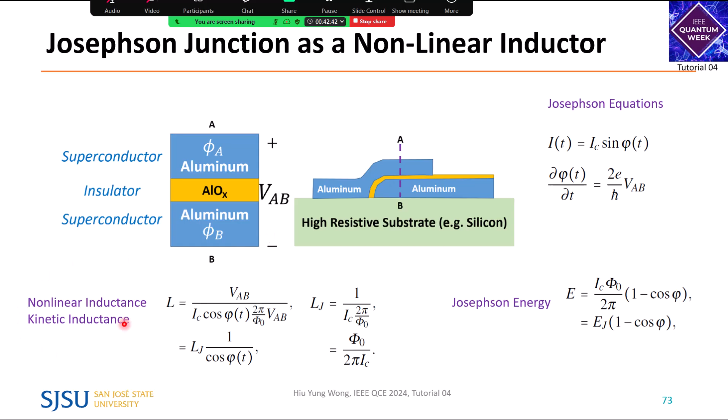So even for a normal metal, we have kinetic inductance. But because of the generation of heat, the slowdown of the electrons due to friction, the resistivity, it is not important. The main point here is that we can create very large inductance with a small geometry with a Josephson junction, and we'll see that later in the tape out. Okay? So the main message to take home is that the Josephson junction provides a nonlinear inductor.

And why is this important? We had a lack of anharmonicity because we had a linear inductance in this LC tank. Now, what if we replace it with the Josephson junction? This is the symbol of a Josephson junction. The cross refers to the primitive part of the Josephson junction that gives you the Josephson equation. But this is a capacitor. Of course, it also has a parallel capacitance, right? So this is the symbol of the Josephson junction.

Now we replace the linear, geometric inductor with this Josephson nonlinear inductor, and put it in parallel with the capacitor. Originally, we had this parabolic potential well in the LC tank. Now with this nonlinear inductor, you get something with anharmonicity, which is actually sinusoidal. It actually has a cosine term, if you look here, but we don't need to go into detail.

Basically, this is periodic. And because of this, naturally, if you solve the equation, the separation of the levels won't be constant anymore. Very commonly, the first separation will be larger than the rest. So with this, we successfully create a qubit with two well-defined levels and a low probability of being excited out of the Hilbert space, that is, the 0 and 1 states that we are interested in.

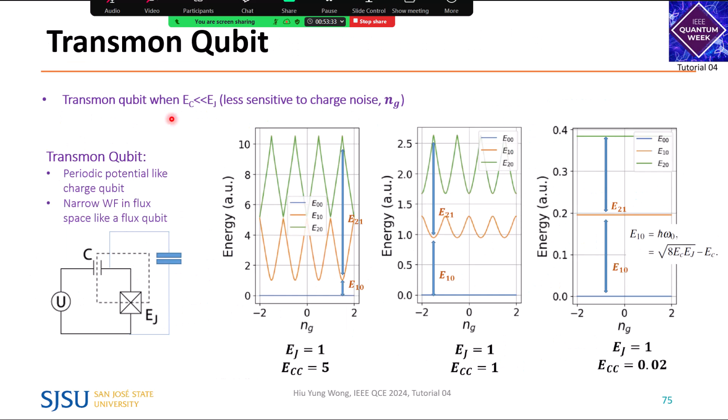So it's the same here. I set up the landscape, then I get this Hamiltonian. Let's look at this Hamiltonian. First, I have omega 0. This is just the qubit frequency, E10 that we mentioned earlier, this one, okay?

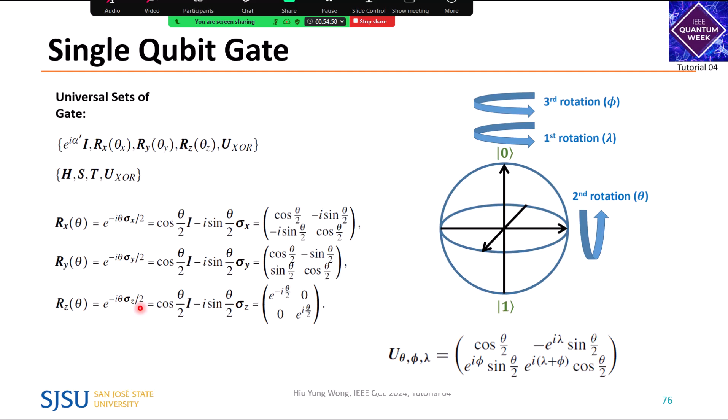z-axis. So with this, basically, I am able to rotate the qubit on the Bloch sphere about the z-axis and also about the y-axis at the same time. And how much do I want to rotate? All depends on how long I apply this pulse and what shape I apply. Is that okay? So here it shows that you can use circuits to control something that looks quantum mechanical.

Now, this is not convenient. Originally we could just stop here, but it would be good to say a little bit more. We don't operate the qubit in this way. You often will hear about something called rotating frame or rotating wave approximation. So what does it mean? This one, although it looks okay, only allows us to rotate about y. That is not enough. We want to have more flexibility. We want to rotate about x also.

So without derivation, we can show that if we work in the rotating frame, it means my whole system is just a mathematical transformation. Instead of looking at the qubit from a lab frame, I try to work together with the Larmor frequency, because it is rotating about the z-axis, just like a merry-go-round. Instead of standing outside, now I jump on top of it and measure the physics. Then we say we are working in the rotating frame. With this rotating frame, we add something called rotating wave approximation. Then I will be able to come up with something more elegant, right? And what is rotating wave approximation?

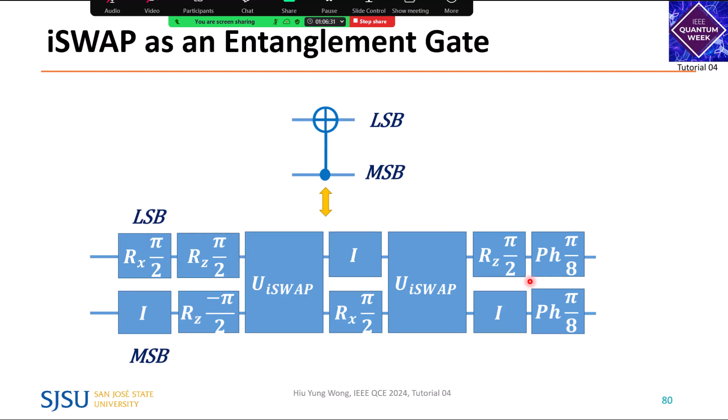So with this, cool, then we are done with the 1-qubit and 2-qubit gates, and we can implement any algorithm from this point onward, right? Although whether it's efficient, that is another matter. Okay, now, so we now have a well-defined 2-level system. We have the universal set of quantum gates, but how do we do the measurement, right?

But no, actually, I need to continue just to talk about the manipulation also. So exactly how a superconducting qubit system usually looks nowadays. These are the room temperature high-speed electronics, FPGA, Python programming, arbitrary wave generator. We can create microwave digitized pulses, megahertz or sub-megahertz high-fidelity digitized pulses easily. That is the S of t, the envelope function we mentioned earlier.

Then we go through the mixer to bring it to high frequency, to gigahertz. Go through all these attenuators from room temperature, and then eventually we reach a resonator. This resonator is coupled to a qubit. You also can just capacitively couple this one to the qubit to do the 1-qubit gate. If you're doing the manipulation, you are done. You send a pulse, the wave function changes.

But if you try to do the readout, you will try to measure the output from the resonator. And then based on the output, you can determine whether it is 0 or 1, which I will discuss later. But the signal, of course, needs to get amplified in different stages, and then eventually down-converted to the megahertz regime so we can analyze it, right? So the whole superconducting qubit is really just one boring passive transmon qubit here. The rest are just the exciting programming, controlling, cryogenic electronics engineering, electrical engineering, right?

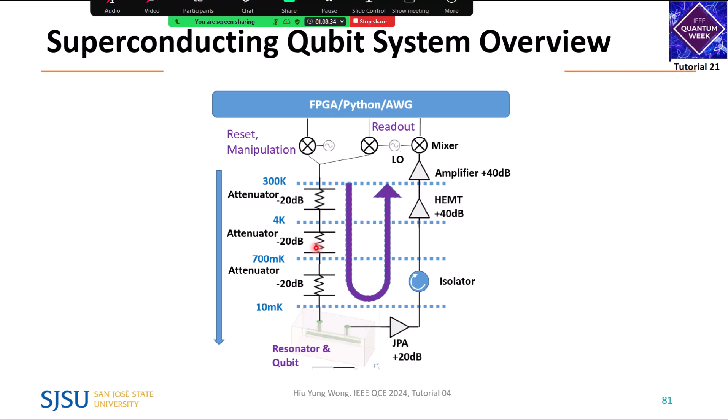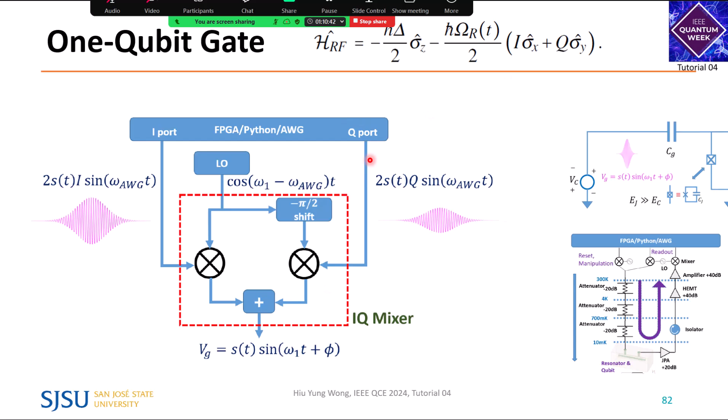And the amplitude of this digitally synthesized curve contains I, which is related to the phase of the final wave. And this phase is going to control how much rotation I have about the x-axis and y-axis. Right? In summary, I can determine how much it rotates about x and y by just changing the amplitude of this signal.

So we are done with the manipulation. Then how about readout? So here I show an example, a possible readout. So it is a transmission line. If I have a signal going in, it actually will get blocked unless this resonator is resonant with the characteristic impedance of this transmission line. Let's say 50 ohm. This is also at that particular frequency, right?

So if I sweep the frequency, at most of the frequencies I cannot transmit any signal. The S21 will be very small. Only when at the frequency of this resonance will I be able to transmit the signal from left to right. Right? So I will expect something like this if I sweep the frequency.

Correct? Now, then how do we measure the qubit? It turns out that just because of physics, which we won't prove here, it's just like the so-called cavity quantum electrodynamics. You put an atom in a cavity, the resonant frequency of the cavity will change based on the states of the atom, whether it's excited or at ground state. And it is the same here. I have a Transmon qubit capacitively coupled to this resonator. The resonant frequency will shift based on the state of the qubit, whether it is at 0 or 1 state.

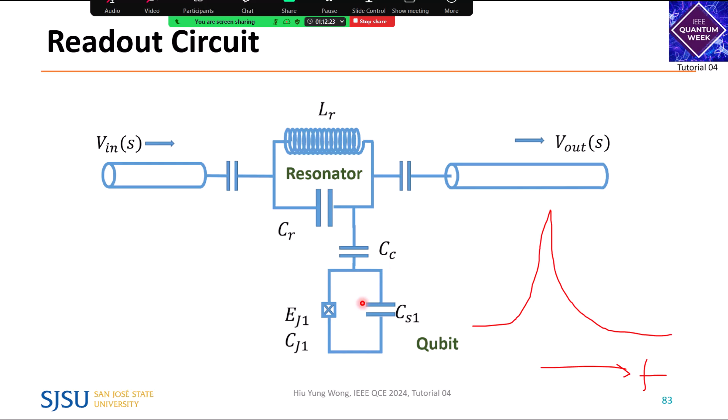In this example, let's say originally the resonator frequency is here. If the qubit is at excited state, the resonant frequency will shift to the left. If it is at the ground state, it will shift to the right. Now, if you try to just shoot a pulse at the original resonant frequency of the resonator, you will get the same magnitude. You cannot distinguish, right? If this is so symmetric like this one, you don't know whether it's at the ground state or excited state, 0 or 1.

However, we will measure its imaginary and real part. If you decompose the imaginary and real part, the blue is for excited state. The real part is the solid line, and the dashed line is the imaginary part. You see that when it is at excited state, the dashed line is about 0 at omega r. For ground state, the green dashed line is also about 0 at omega r. But for the real part, the excited state is negative. The ground state real part is positive.

So based on this, you can think that, hey, I just measure the transmitted signal. If the real part is positive, then I know it is at ground state. If the real part is negative, then I know it is at excited state. And basically, this is just measuring the phase information of the transmitted pulse, right? So this is something called measurement using the dispersive shift of the resonator. And the difference of this frequency is called the chi. This is a very important engineering problem in superconducting qubits. You want to have enough separation, otherwise you won't be able to distinguish them. So the chi needs to be large enough.

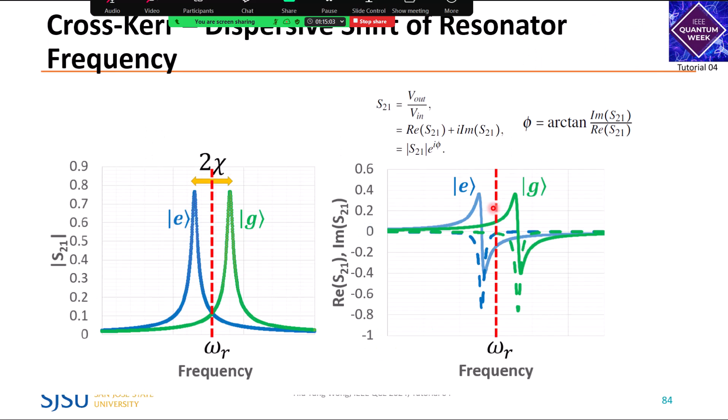Now, if everything is ideal, then if it's at ground state, I will get a positive real part. If it is at excited state, it is negative, right? So I just measure it. I see a negative value, I say this is 1. I see a positive value, I say this is 0. But in reality, you have noise. When you have noise, you can imagine that this will fluctuate because of the noise. So when you do the measurement, you actually have a distribution about these 2 points.

It is also very common that people don't plot it in this way. They do some transformation, plot it like top and bottom, on the so-called IQ plane. This is in-phase, this is quadrature, which relates to the microwave signal we are processing. But the microwave signal, again, is just related to the phase, right? That's how they call it. So when you have noise, this circle will get larger and larger. Or if your chi is not enough, the dispersive shift is not enough, they will get closer and closer.

Now, once they touch each other, then you have a lot of readout noise. For example, if I find a point here, it has a certain probability this is actually a ground state. It also has a certain probability this is really the excited state, right? And that is the readout noise that one will get if you don't have the right design.

So how do we get this IQ plot, right? It is just the inverse of the manipulation pulse generation. Here represents what goes out from the resonator, right? We shoot in the pulse, and then now we go back to the amplification train. So what we do, again, I just make up the math.

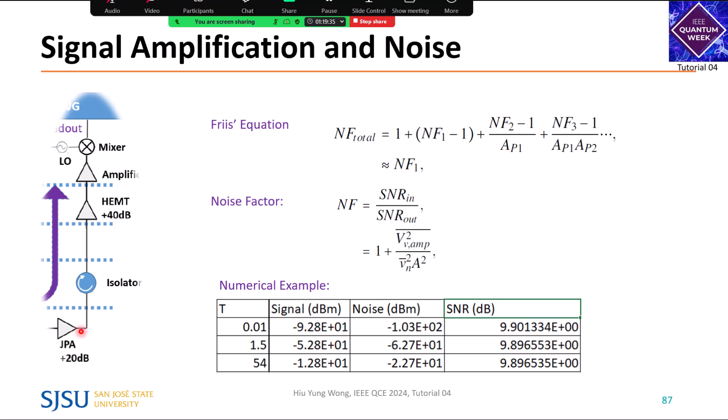So that's why we want to have a low noise figure first stage amplifier in the train. In other words, we want an amplifier in the first stage that injects the least amount of noise to the signal, right? It keeps the signal to noise ratio as high as possible. And what is that? Theoretically, the best one is a quantum limited amplifier. You cannot design an amplifier that does not add additional noise to your signal because of quantum mechanics, because of the Heisenberg uncertainty principle. People mathematically proved that. So this is just something I want to highlight.

Because of time, maybe I will not talk about parametric amplification. This is just to explain what a quantum limited amplifier such as a Josephson parametric amplifier does. I won't talk about the classical example, but here I'll just tell you how it works. So you have a signal coming in. It goes through the circulator. A circulator basically directs the signal to go around this circle. It cannot go back. And then you have a Josephson junction.

Again, why a Josephson junction? Because it provides non-linearity. So this forms a SQUID, and this is an inductor. If you have a flux that is 2x the frequency of the signal, it helps to mix them together, and somehow it can increase the signal strength of the incoming signal. Okay, and this is just like the swing, right?

When you're playing on the swing, you need to stand up and down at 2x your swing frequency. And that is called parametric because you're actually changing the parameter of the swing. Because you go up and down, you're actually changing the centroid or the effective length of your swing, right? Or the center of mass of the swing. As a result, you are able to amplify the swing. This is something like that, right?

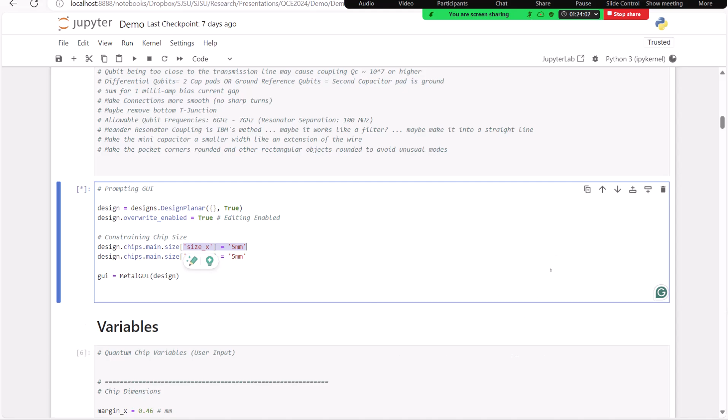You can define, for example, I want to design a chip with a chip size of 5 millimeter by 5 millimeter. I define the variables. I define the length of the resonator. I decide the launch pad, etc. So let me just go all the way to the end because it's not my intention to discuss the detail.

So now, it crashed. So this is one problem. So let me do it again. Restart the kernel. Okay, that works. I need to run it first. So you may run into this problem. But again, I show you the link to my video, and also you can go to the Qiskit tutorial. They have a lot of good examples. Of course, ours is modified from theirs.

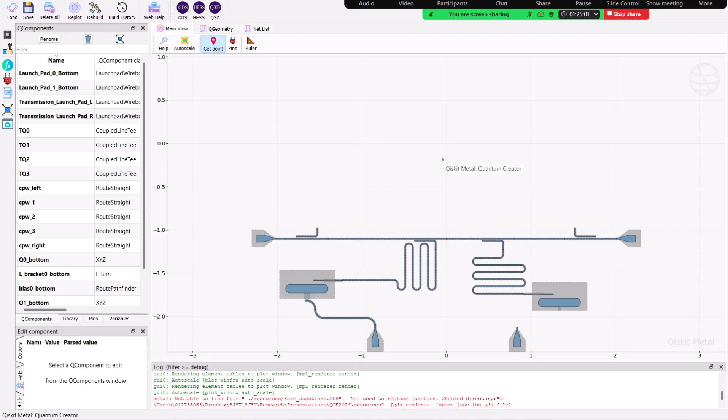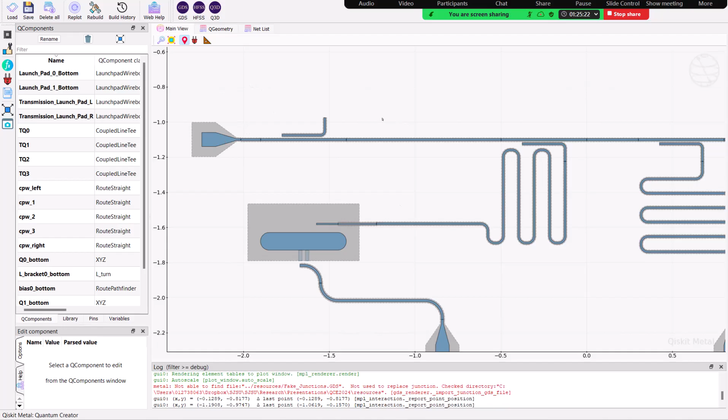So now look at this. From scratch, it generates the whole circuit for us. Of course, we need to keep testing until we get the right thing. You see that this is a launch pad. And then this is a coplanar waveguide, a transmission line. Now, if I zoom in, this is the transmission line. Let me zoom more. You don't see this here, but when you generate the GDS, this will be the superconducting metal. And then this is also the metal, and this is the gap. So let me show you what it means.

So let's say this is the transmission line. This is the GDS it generated. You have the gap. If you do a cut in AA, you see that these are the niobium superconducting metal. And then these are the spaces. The middle is the signal, and then space, and then ground plane. Okay, so ground plane is everywhere. That's the first thing.

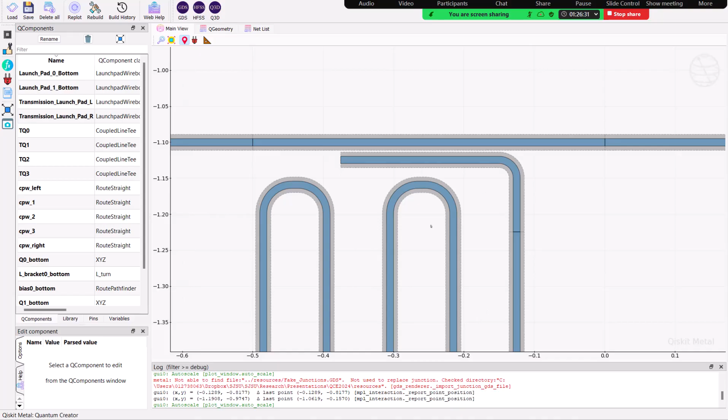Second thing is, with this transmission line, just like for readout, if I have a signal come in, then it will go all the way to the right. But you see that here, we can couple capacitively, but in this design, it's inductively coupled to a resonator. Why do I say it's inductively? Because you see that this is a conductive plane. All this white part has not rendered yet. Eventually, it will also be metal. So this is metal connected to metal. So it's grounded. So there's no voltage signal, but it has a lot of current. So it's inductively coupled to the coplanar waveguide.

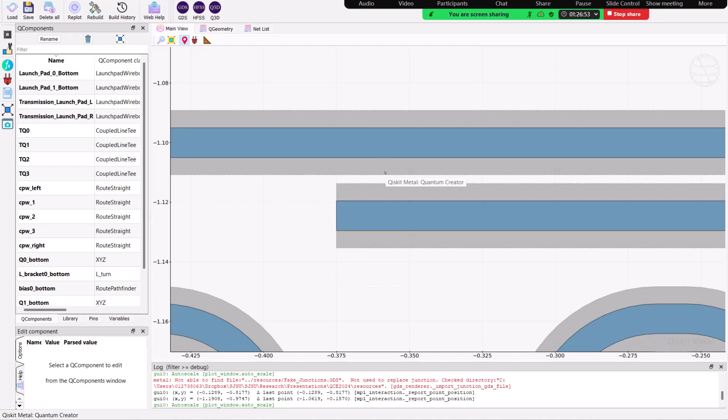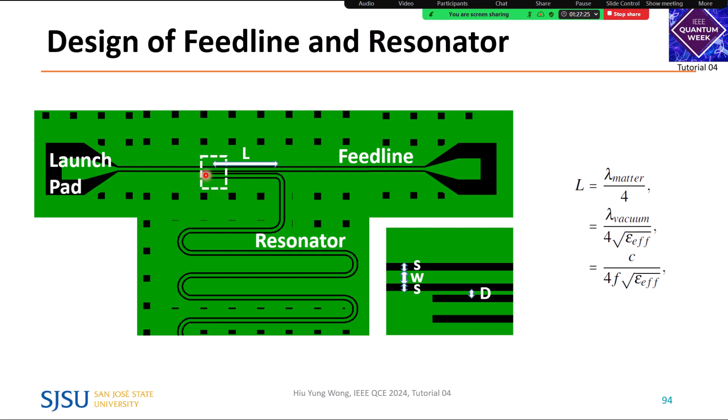So what? Now, if you inductively couple to this, then this is a resonator. You design it so that you have the right resonance frequency. For example, in this case, we design it so that the length is lambda over 4. That means the length of this resonator equals the wavelength divided by 4. And because it's inductively coupled at one side, it's shorted. And I did not tell you that at the other end, here, it is capacitively coupled to the transmon qubit.

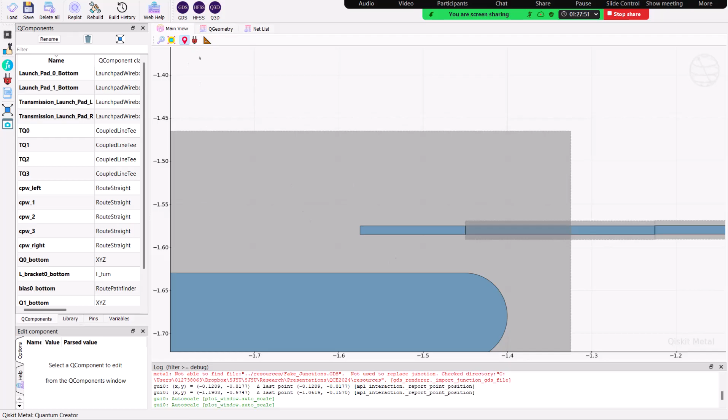So lambda over 4 is the first mode that it can have. Just like the guitar string. But with a guitar string, both sides are actually fixed. Now it's lambda over 4. So that's the first thing. So that's how you design it. Another thing is about the transmon.

So there are many ways to design it, right? Also, what I'm showing you is not the final one or the best one, but we can see a little bit here. Here it's just a placeholder. We have not put the Josephson junction yet, right? When we tape out the GDS, we will then put the foundry's layout. They will provide us the layout of their Josephson junction, or they will put it for us. We just say that I'll put it here, and we tell them what Josephson inductance we want.

So you see, this is a big cap, right? And then here is also ground plane. So basically, we form a big capacitance here. So that's why this is a transmon, because I have a Josephson junction and it's in shunt with a capacitor, right? So, yeah.

Just for layout, it is not. I will explain more later. So he's saying that it's not a part of this layout. At this point, it is not. But actually, a little bit. Let me talk about that. But anyway, this is a Josephson transmon, and it's capacitively coupled to this resonator. So we can also use this one to manipulate the qubit.

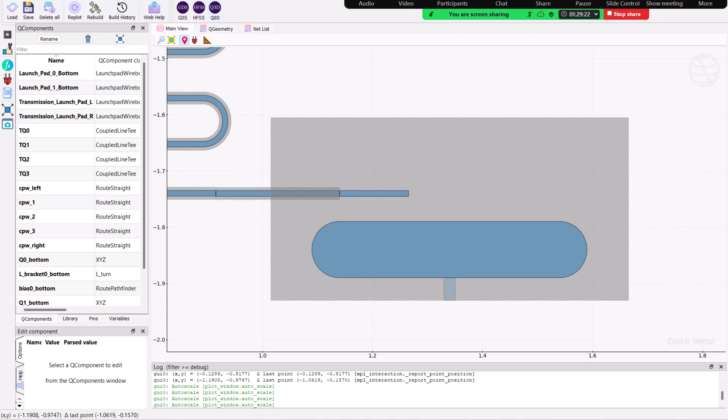Now, for example, in this particular case, we actually share 2 qubits using one single coplanar waveguide. We can use it to read the states of the qubit, and we also can use this to manipulate the qubit through this resonator capacitively. Of course, we need to design them so they have different qubit frequency. So this is a little bit like frequency multiplexing, but not at the same time. We can selectively adjust that.

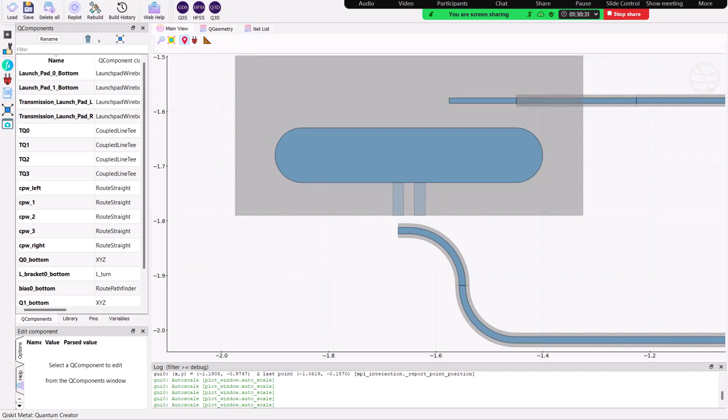On the left, I want to show this because you see we have placeholders to put two Josephson junctions. That is because we want to make a flux tunable qubit. I told you earlier, the flux tunable qubit is made by putting two Josephson junctions together to form a loop. And this is the area of the loop. So go back to your question. The only thing that we decide with the Qiskit Metal, up to this stage now, is how large the loop is, because it determines how much flux we can go through, right? And we couple it to this line, and this is the flux line.

When we want to tune it, we will apply a current here. And if you look at here, again, this goes to the ground. So the current keeps flowing, and you can imagine the magnetic field will go around so that I have lots of flux going there. So by changing the strength of the current and the duration, the strength of the current will change the frequency. So I can bring them together. And for the right time, then I can make an iSWAP gate.

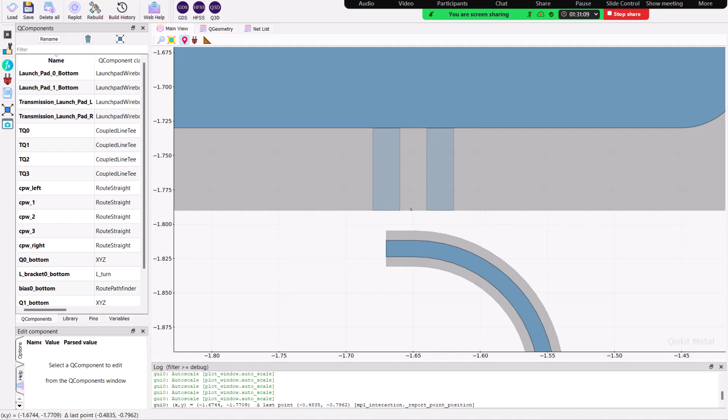But here, of course, be careful. I did not couple them. So these are actually two separate qubits. I did not show that. If I want to make a 2-qubit coupling, I need to add a capacitor to couple them together. Then it is a 2-qubit gate. Again, a very hand-waving discussion.

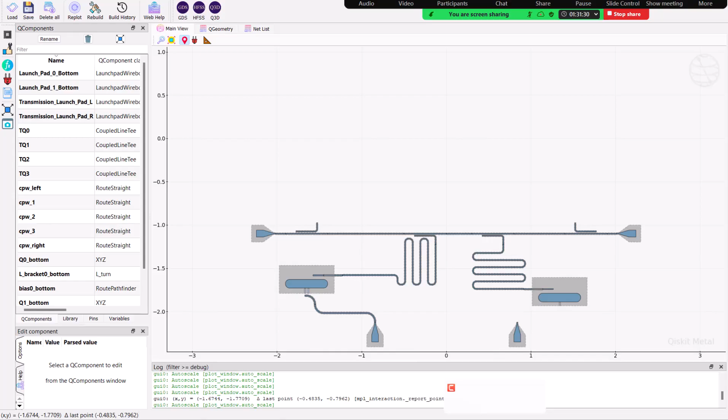But this is the first thing regarding the Qiskit Metal, right? It helps us to generate the layout easily, and you can just modify it. If you find something wrong, regenerate. And these are very common tools being used, right? So I already explained all the components here. Yeah.

Yeah. They do. They do. No, this one is just for layout. We have not done the simulation. I will talk about simulation. Here, instead of manually laying out, you use this script to help you lay out a big chip, for example, right?

So now our goal is that when you want to design a circuit, for example, I want to design this 1-qubit gate. There are a few criteria. Remember, I want to make it a transmon. I guess I have a typo. It should be EJ over EC larger than 50. Sorry. We want to make the Josephson energy much larger than EC, right? So this is a typo. Should be larger than 50.

We also want to make the anharmonicity at least 10% of the qubit energy, right? It means that E21 minus E10 had better be 10% of E10. Now, this one I did not discuss. It's worth mentioning a little bit, and also it's almost time's up. So far, if you remember all the currents I showed you about the Josephson junction, it depends on something called IC, the critical current. This is the current above which you will lose the superconductivity of a Josephson junction. You cannot put too big a current through it.

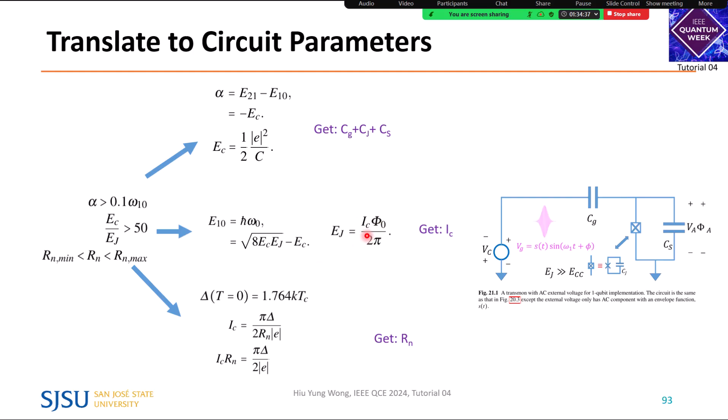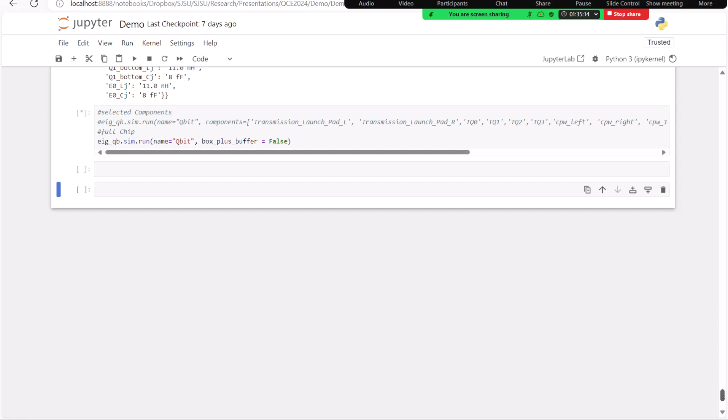We discussed that already. Then the last thing is this. Now, you were asking, do we need simulation? Yes, we definitely need simulation. The second part of this script is that now, with this, we created the layout. We will then call a tool called HFSS. Instead of manually drawing your layout in HFSS, which is a microwave simulator, it will call the tool and perform the simulation. It takes time to load, but while it's loading, let me just say a few final words.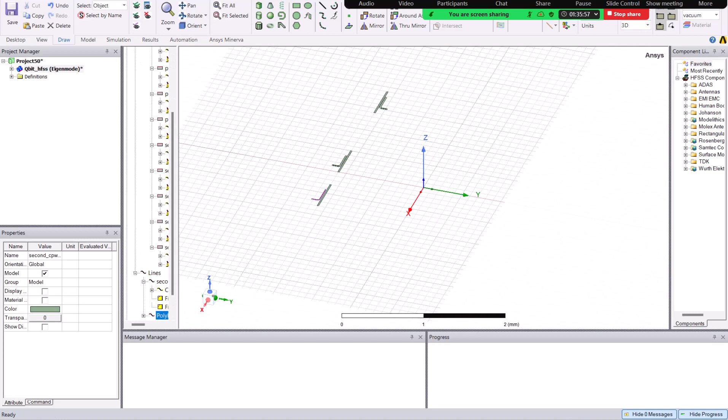First, you draw it, and we will just assume the Josephson junction has the Josephson inductance that we want. Now you see that the whole game is all about having the Josephson junction as a nonlinear inductor. So we don't need to do any quantum mechanical simulation, right? All we need to do is assume that it has a certain inductance. Then we can do the circuit simulation. Now you see that it rendered the structure we have drawn here very nicely. It takes maybe 1 minute to render, and then it will start doing the simulation.

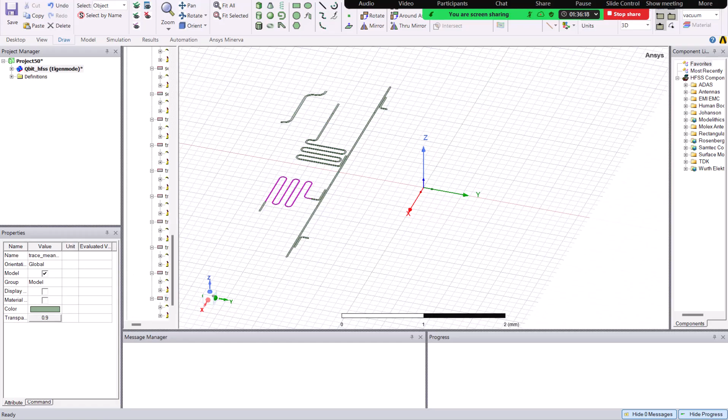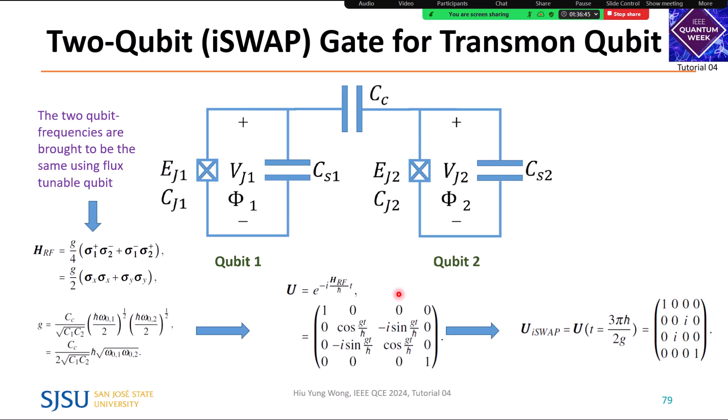What does it do in this command? We ask it to find the eigenfrequency and also the Q factor of the circuit. The eigenfrequency will give us the qubit mode, the resonator mode, etc., so that we can make sure that what we are designing meets the spec we have. Because again, remember, for example here, G, the coupling factor of the 2-qubit gate, depends on the resonant frequency of the 2 qubits. And that resonant frequency can be simulated, which it is simulating now, right?

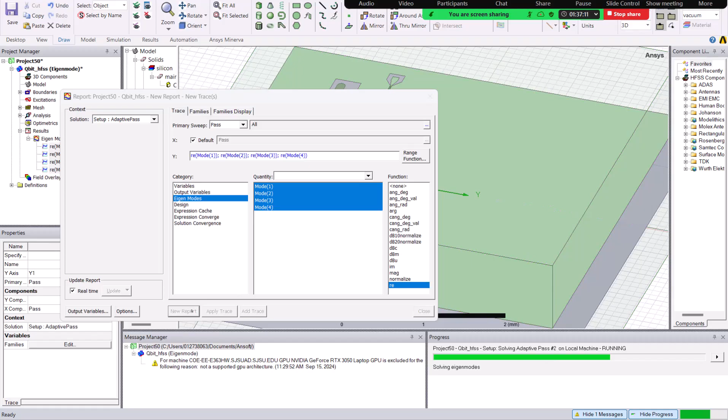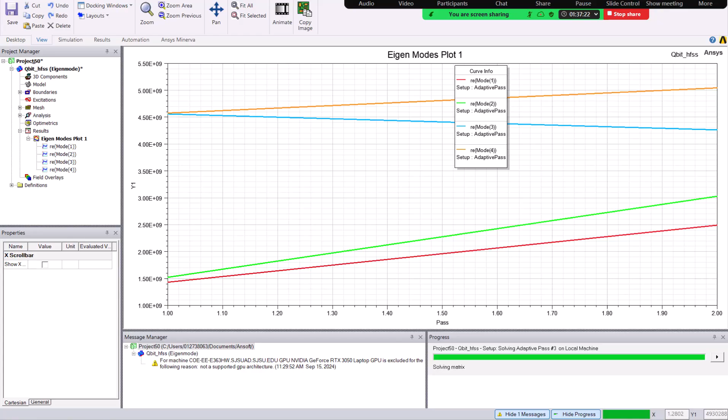I can go to results, create a plot, and then ask it to plot the frequency versus the passes. Passes are how it tries to converge. I'm trying to simulate 4 mode frequencies. It only finished 2, but gradually you see that it has 4 modes. I have 4 important parts. If you look at this structure, I have 2 qubits and 2 resonators, right? So I can actually try to see where they are based on this.

So, just give me 1 more minute. I know it is 2:30 already, right?

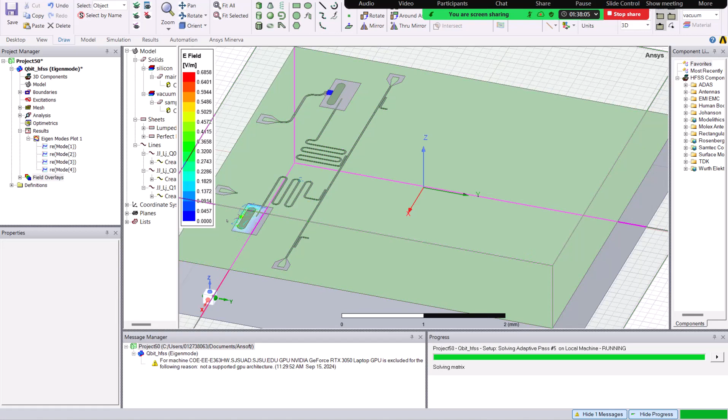So I'm going to right click. I will ask it to plot the field, the electric field on the structure. And it will keep updating, right? Because it still doesn't have the right result, so it's still a little bit noisy. But you see that the first mode is this qubit. And I can ask it to plot the second mode. I go to analysis, field, edit source. Right. So instead of plotting the first mode, I ask it to plot the second mode.

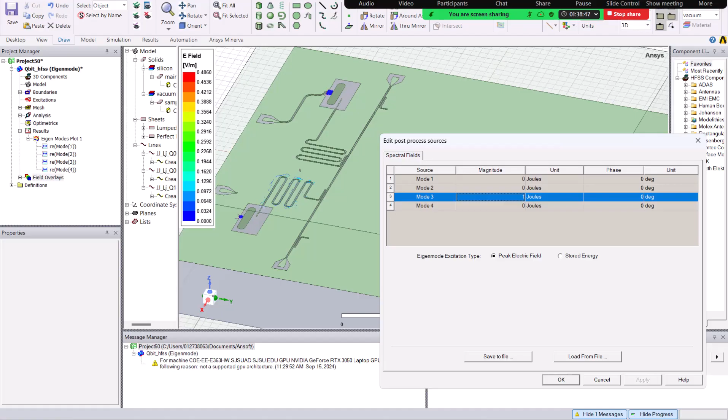Then I see the second mode is on the other qubit, right? And maybe just one more demonstration, ask it to plot the third mode. And you see that it's at the resonator, right? It is not converged yet, so that's why it is not very nice, but it gradually converges. Now you can go back and say, hey, this is not the frequency I want. Then you go back to redo your layout and simulate again. And eventually you need experimental verification.

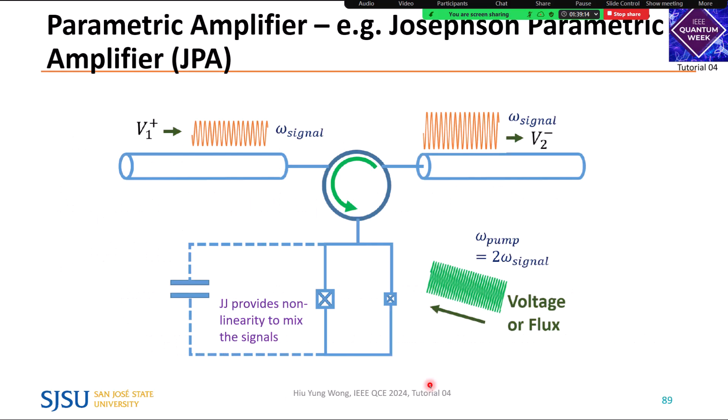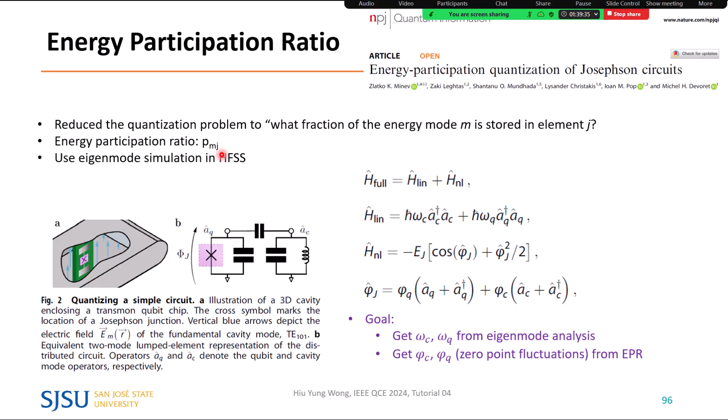This is useful, but one thing even more useful is that people have developed something called energy participation ratio, or something called BBQ, black box quantization. We just need to do this classical simulation, and this classical simulation will tell us how the energy participates in different components. They came up with a theory that tells us you can find the chi, the cross-Kerr. What is it again? It is how much you shift the resonator frequency for readout. It can also calculate the anharmonicity. So you just do this classical simulation.

You already know what the cross-Kerr is, what the anharmonicity is. Then you can design your quantum chip already. And that's why I say you don't need quantum mechanics. Everything is purely classical at this stage. But we assume they do the right thing. Yeah, and I do have a video on how to do installation of this, do the EPR.

And I think we will just conclude here. That's all we have. Maybe we can take questions?

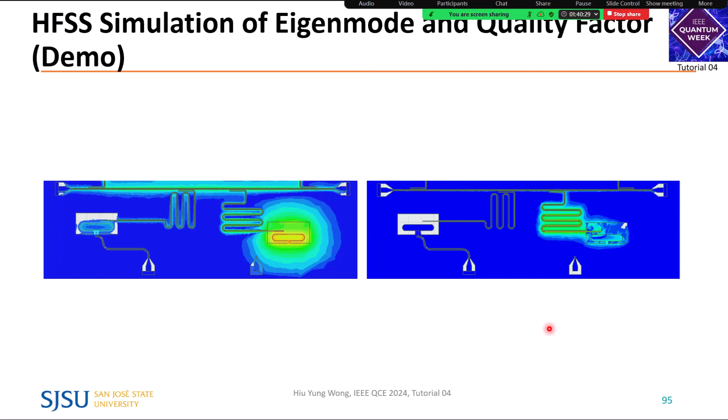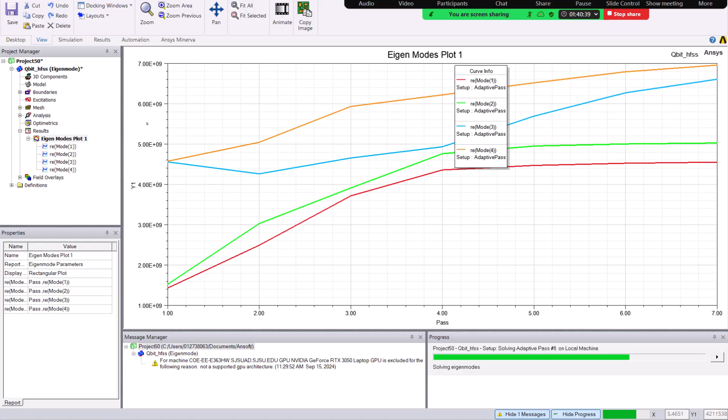Actually, what's your favorite way to simulate superconductors in this process? So I think you run eigenmode simulation assuming the superconductor. Yes. Yeah, so we don't really simulate the superconductor. We just make it a perfect electric boundary condition. Yeah, and that's it. Okay, so now it's Q&A, so I can spend more time. Feel free to leave if you're in a rush. But I want to show you this.

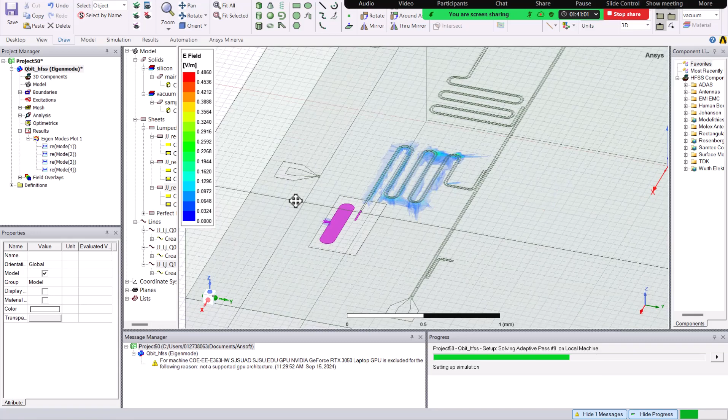In principle, right, you want to simulate the Josephson junction. So here we have a Josephson junction. In principle, you want to simulate it. But actually, we did not. What we did is just add a boundary condition to it. Yeah, exactly. We define an inductance here with a variable. And that's it. We just make a boundary and say, oh, here I have a 10 nanohenry inductor.

So that's it. But in general, you should have simulated superconductors, because they have kinetic inductance for the readout resonator all the time. We don't. We just make it a perfect conductor. Kinetic inductance, you mean for the Josephson junction or for others? Well, like for the resonator. Yes. Yeah, maybe it's not large. I have not heard of people doing that. Yeah, you only simulate geometric inductance.

It's like a deep dive of the resonator. The metal is niobium usually. Yeah, but it's in the superconducting state. I'm also doing it a different way, like either the surface impedance, which is frequency dependent, or like a complex dielectric with real and imaginary parts of the model.

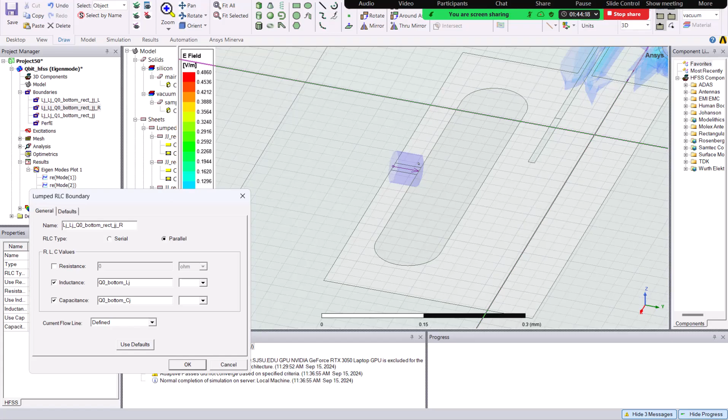Yeah. Indeed, for superconducting qubits, calibration is very important. So they spend a lot of time calibrating, first classifying 0 and 1, particularly since some of the states can go to 2. So you want to do that calibration. And then they come up with a confusion matrix, like you put in 0 and 1, and then you correct what you have done, and use that to make the readout more accurate. So calibration is important.

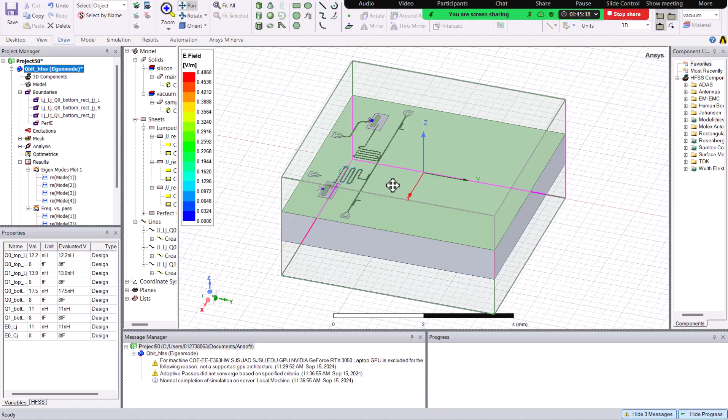Okay, any other questions? Kind of a naive question. For your CPW, for the readout resonator, do you define the length to the edge of the ground plane hole that the qubit is sitting in? You mean this part, the resonator or the CPW? CPW. This one? Oh, here.

Okay, another important thing is how long you want it to overlap depends on the quality factor you're looking for. You should not have a very high quality factor because then it means you take a long time to read. Usually we make it about 5,000 to 10,000, and that will give a reasonable readout time. Because if you don't interact, you can never read anything. But if you have too much interaction, your qubit can lose information to the outside very fast. So you design it by the Q.

The part that extends to the area with the qubits. Oh, this one? Yes, we try to do this. Again, this is not exact, it's just theory. So we go from here to here. And then after that, we do simulation to verify that it does oscillate at that frequency. But yes, we include all the way from here to here.